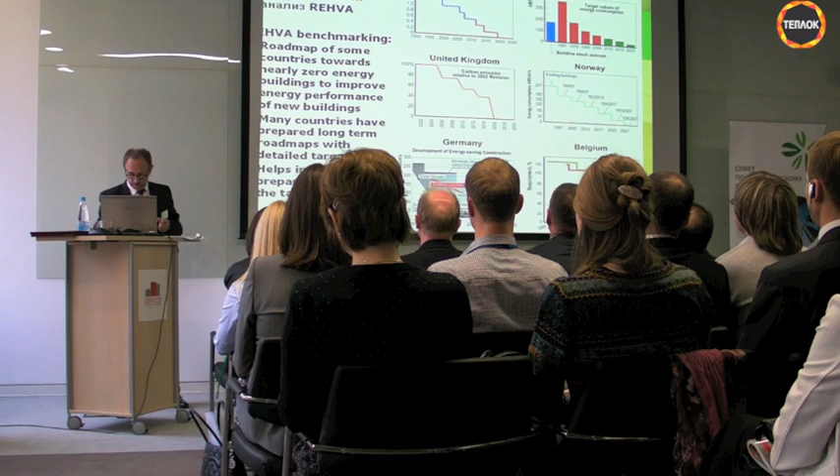And to reach these targets, there are all kinds of incentives for businesses and individuals. The first one is funding for energy repairs and renovations, which takes place in most countries. These are very challenging for low-income households. That's why there is financial help in most countries for these kinds of families. And there are green loans, tax deductions, and so on.

What started this year was the feed-in tariff, which means that individual buildings can also produce electricity to the national network.

Okay, so let's see the energy consumption, where we were in history and what the target is. This is energy consumption in kilowatt hours per square meter annually. The building stock in the 70s varied very widely, from 150 to 300 kilowatt hours. And I think this is the case also in the old building stock in Russia.

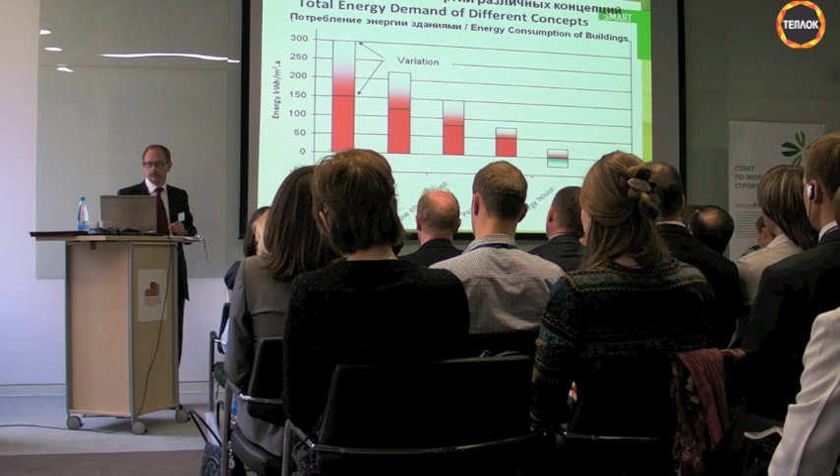If we use solar energy, let's say having solar panels, this production takes place from March till September, October. But the consumption has its peaks during the winter time when there is no production of electricity or energy. There are ways of storing the energy, which we see a little later on.

In many countries, there is also talk of having so-called eco-cities. The first eco-city in the world is Masdar City in Abu Dhabi. That's going to be a city for about 20,000 inhabitants. The first phase was already finished last year. We are also opening our office here this month, or let's say in June. Masdar City has the target of being a zero energy and zero emission city.

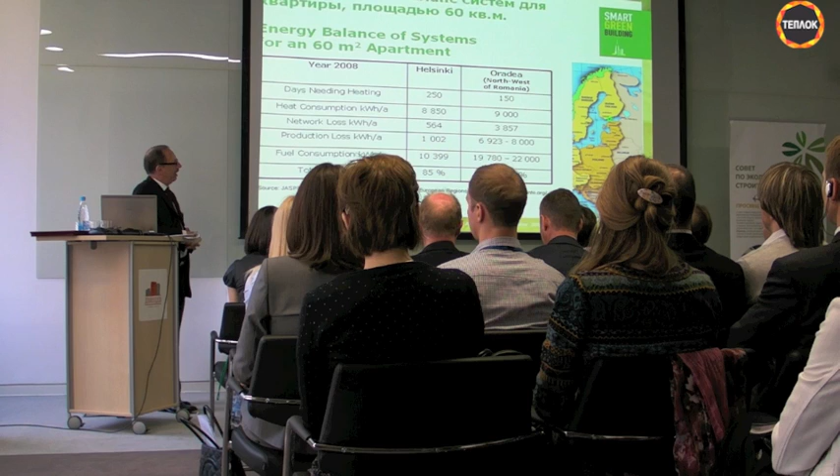Then production losses. In Helsinki about 1,000, in Oradea 7,000 to 8,000. Fuel consumption in Oradea is 2 times higher. And then we come to the total efficiency, which in Helsinki is 85% and in Oradea about 40%. So this shows where the elephant really is, in the production efficiency and also in the distribution efficiency.

The network losses are due to leakages in the network. Also, the water temperature is much higher in the Oradea than in the Helsinki network. Also, the insulation of the distribution network is poor, and balancing of the network is not actually done. But anyway, even though the distribution network is the main focus, there is still reason to focus also on the individual buildings, how to manage those.

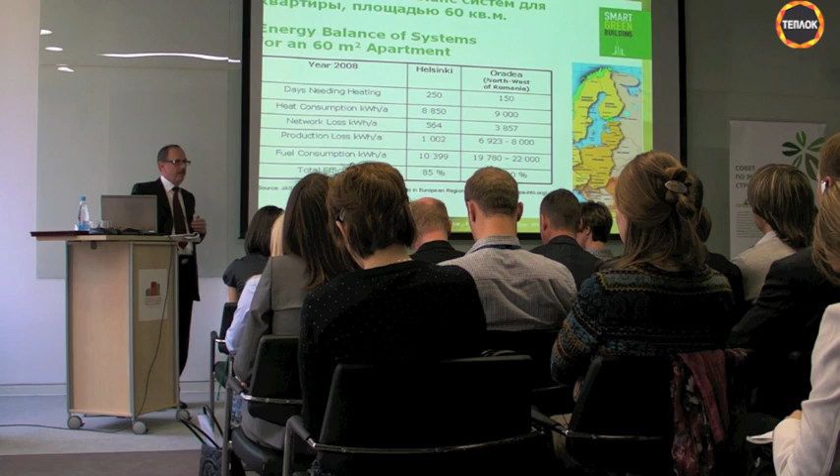The Oradea figures are about the same as in St. Petersburg. And I don't think Moscow differs a lot from these figures. I haven't actually seen any figures from Moscow; if somebody knows if there are these kinds of figures, I would really like to see those.

Okay, then let's go to individual buildings. When we are speaking about sustainability, we are speaking about energy savings, but we are also speaking about good indoor air quality, which means healthy living. And the key factor to both of these is that the building envelope is airproof. If we have air leakages through the structures, it means that all impurities are sucked into the indoor air.

Also, we know that there are impurities in the insulation, bacteria, fungus, dust and so on, and those are also sucked into the indoor air. Also, these air leakages form cold bridges, which means that there can be condensation of indoor air vapor in the structures. Okay, that's one key, and I think already in this respect there is a lot of potential in the present way of construction.

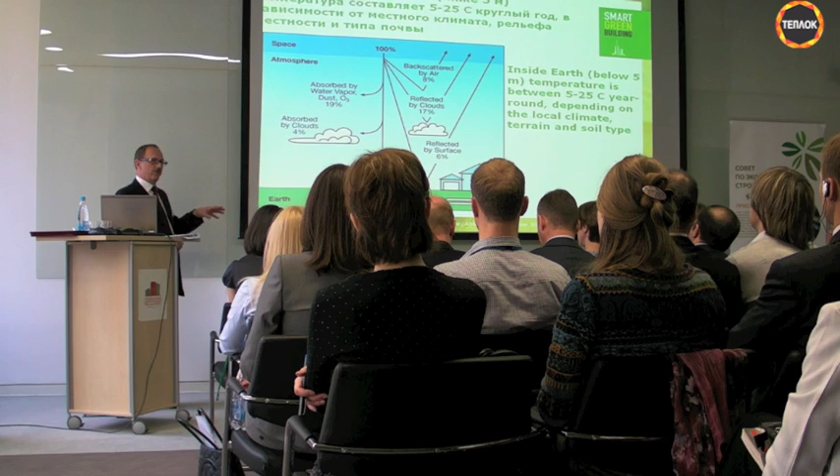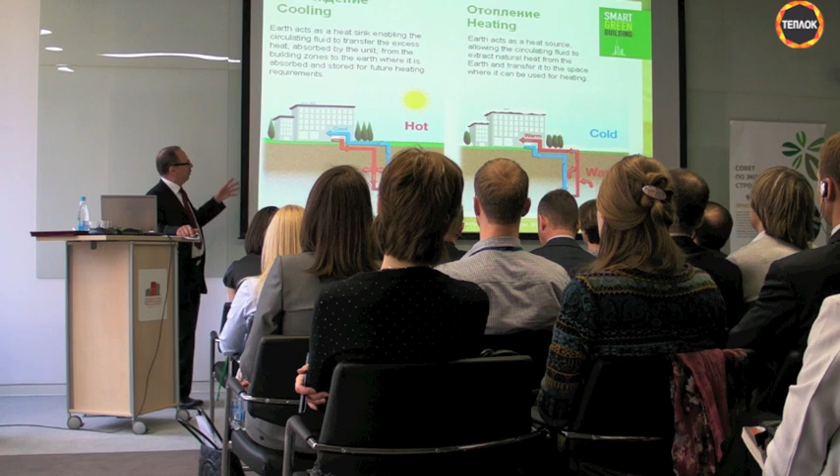And the reason is that inside the Earth the temperature is about stable, and in Russia it is somewhere between 4 to 10 degrees. And that is enough, of course, for cooling, but also for heat. Then we come to the question of storage. We have this kind of system where we have heating and cooling in the same system. In summertime, when it's hot, we can use the energy for cooling.

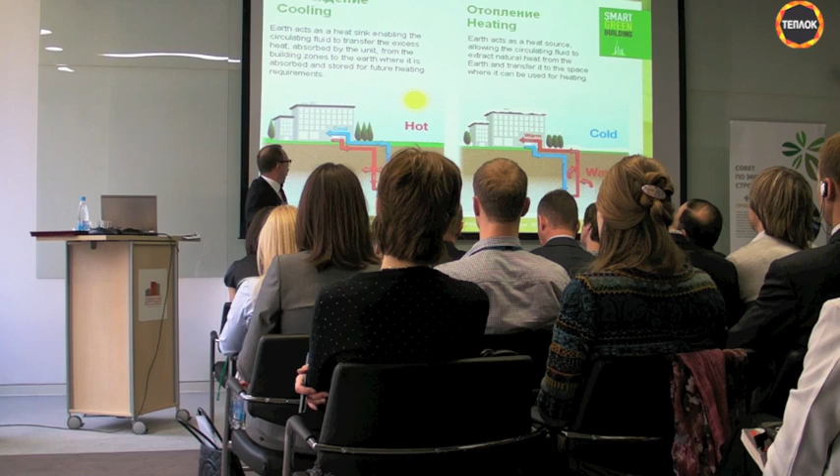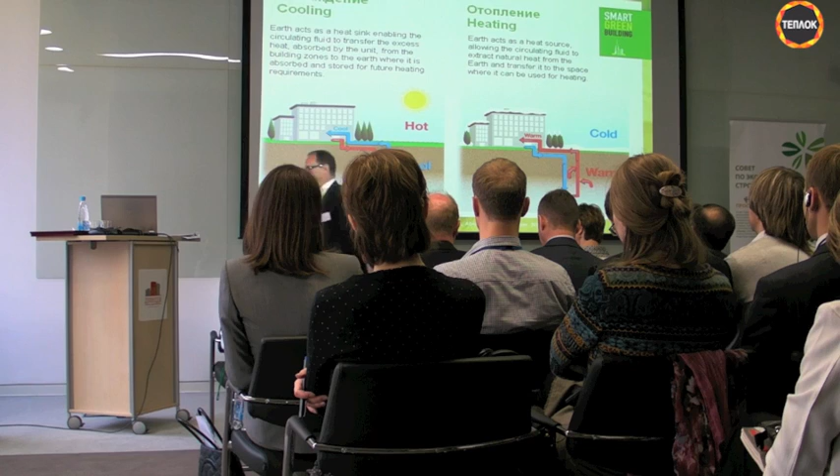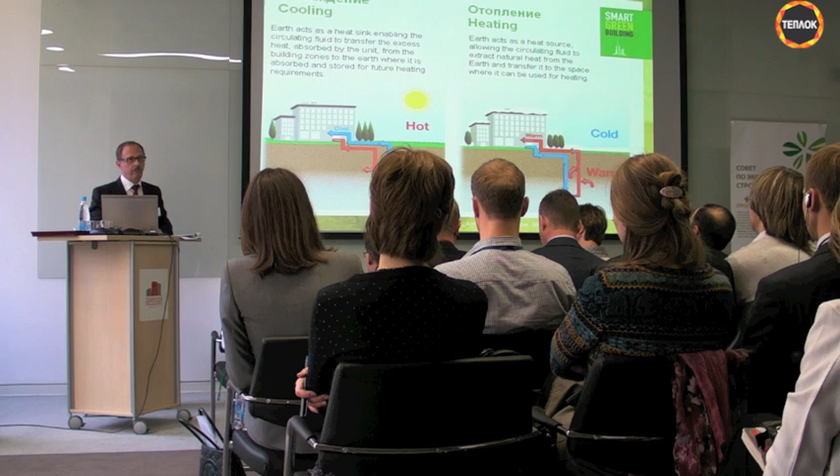It means that we take the coolness of the earth and we return the hot energy to the subsoil. So the ground is the storage. In wintertime it works the other way: we use the heat energy which we have stored there, and we return the cold energy and store it. Actually, that's the way quite large buildings have been done in recent years. And at the moment, most private villas and houses are built this way.

And in these small houses, we can use horizontal closed loops or vertical loops, which go down to 100, 200, 300 meters, depending on the subsoil conditions. A few years ago, we had this kind of project somewhere north of St. Petersburg, and I've been trying to remember the name of the place, but I can't. It was a project of, I think, 12 villas.

The investment cost of this kind of system, the payback time is about 5 to 7 years. And after that, of course, the cost is quite low.

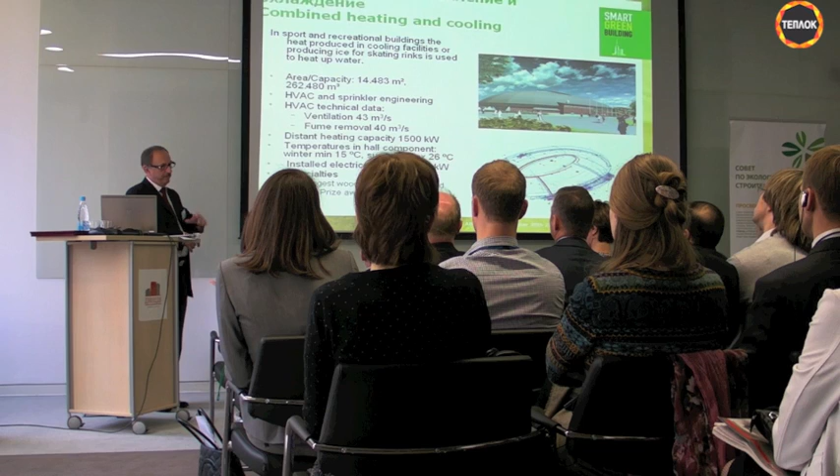We have made benchmarking with, let's say, the US systems, how they make this kind of sport halls in the US. They have separate systems for making the ice and a separate system for heating up. So the energy consumption is actually twice as high. So this kind of thinking is taking place more and more.

Okay, then ventilation is actually one of the main reasons for energy losses in buildings. There are many kinds of technologies to use this ventilation energy. Juha Pihlajamäki is going into details in his presentation on how to recover the heat from the ventilation air. But as you can see, with some systems, up to 90% of energy in the exhaust air can be recovered.

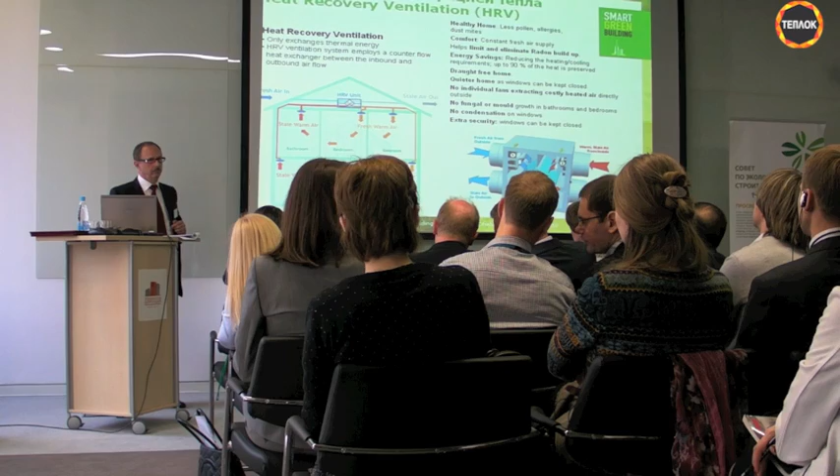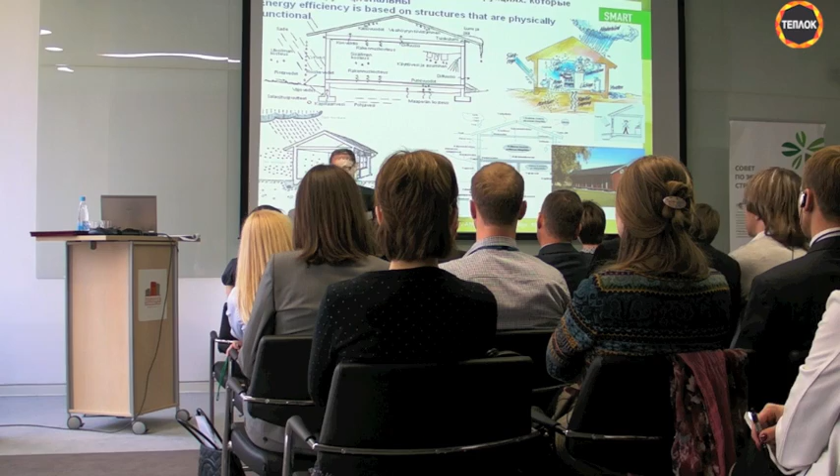Okay, I spoke about the airproofness of the building. That is one theme. Then the other aspect is that energy efficient buildings and structures have to be physically functional. We have moisture coming from rain, from external humidity. There is moisture in the subsoil. There is humidity indoors, which can condense into the structures. So, one of the keys is how to manage the physical loads.

And one interesting dimension is that the climate has been changing so rapidly that the traditional detailing, for example, of facades and roofs, doesn't function anymore. So design has been copy and paste. If we copy the old types, we will not be successful.

Here is, yes, related to the humidity. One key question is, are the structures able to dry out? Because during the installation, during the construction phase, we bring a lot of moisture into the building. We have concrete, we have all kinds of plasters. Then there is rainwater coming and snow. So are the structures able to dry out fast enough?

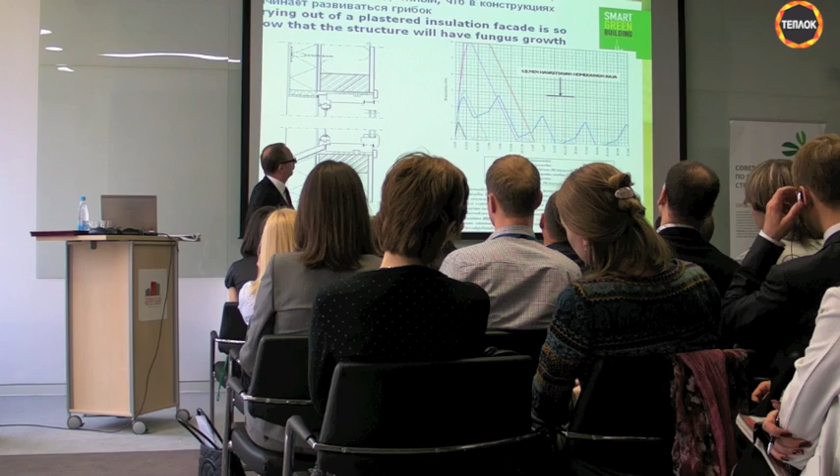Here is an example. We have a plastering, let's say thermoplaster, meaning insulation and then plaster on top. And during the execution phase, some moisture has been coming into this layer. Then with different kinds of structures, we have made simulations of what happens. And with certain materials, we can see that the dry out time is so long that fungus growth starts taking place.

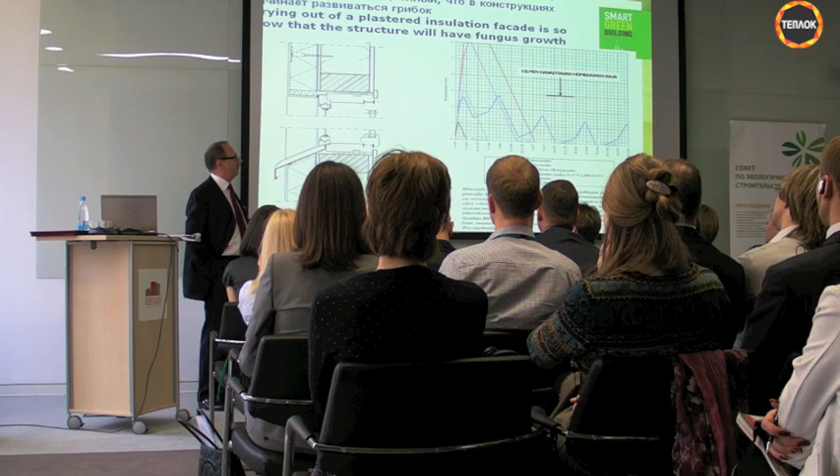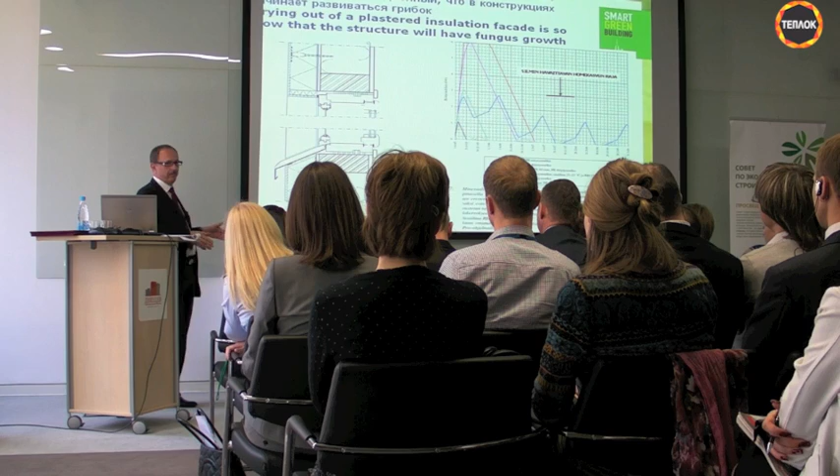And why this is important is that when we are making energy efficient buildings, we are all the time increasing the thickness of insulation. And when we are increasing the thickness of insulation, also the drying out time usually gets longer. The result can be this. In this building in Sweden, the dry out time has been too long, and you can see that there is a lot of fungus in the structure.

Or when we have this kind of brickwork structure, which is very common in Russian facades, we know from practice that it is not waterproof. So after a rain of 10 to 15 minutes, there is water going through the brickwork, running down, and the structures are getting wet.

And it's very typical to have a slab coming to the facade, and the brickwork starting from the edge of the slab. So from practice we know that these places are going to be moist and wet, and there is going to be fungus growth. And as a result, we will also have a sick building with poor indoor air quality.

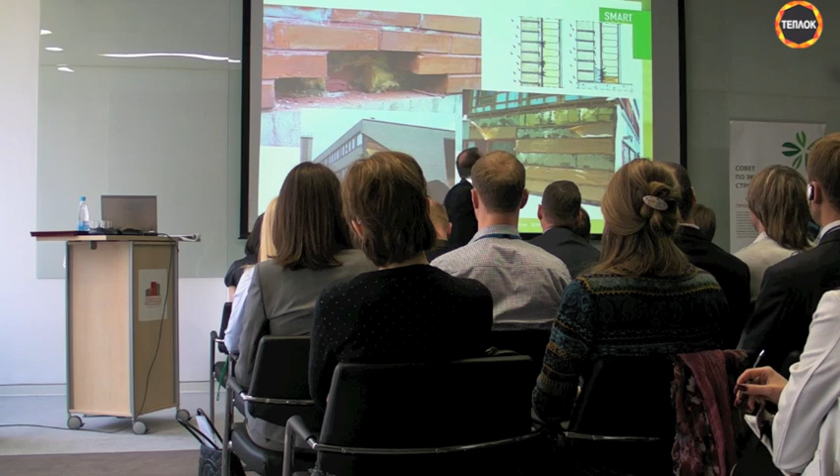So when we are speaking about sustainability, cold bridges like this slab coming to the facade are not allowed. And also we have to manage the water so that it doesn't cause problems. Also, if the insulation is wet or moist, the insulation capacity is much lower.

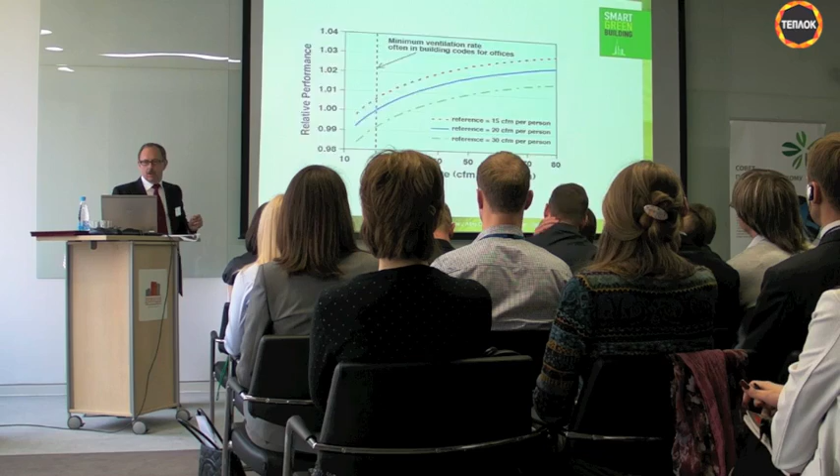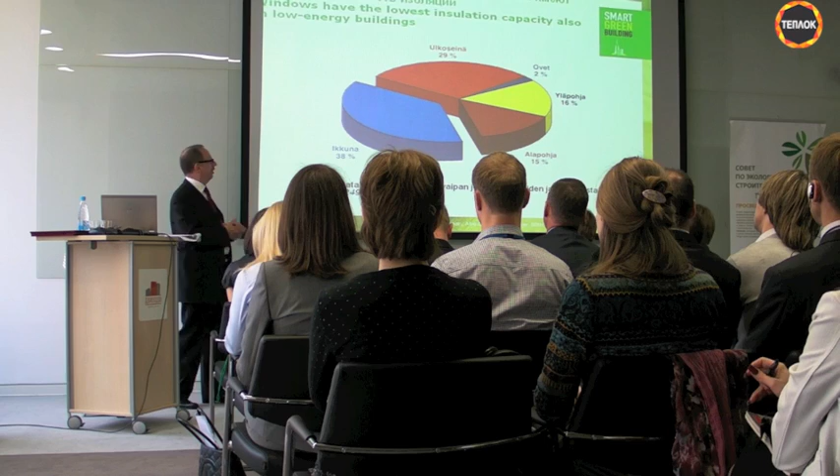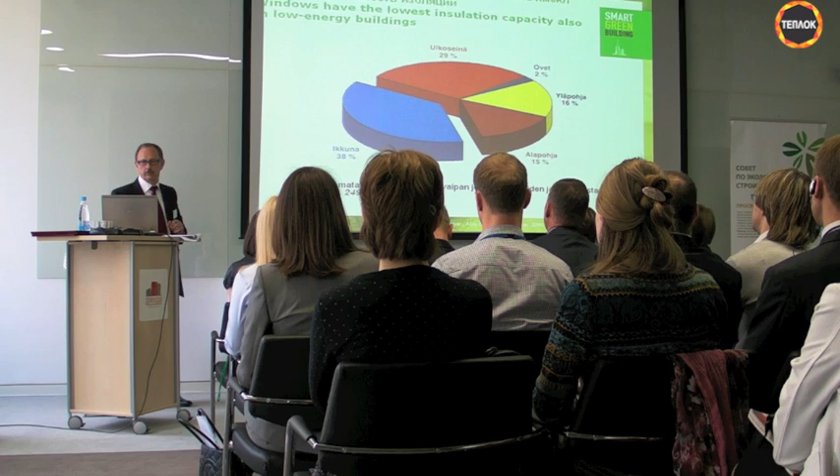Okay, I'll pass this. Then, when we have a passive or low energy building, meaning that the facades and the roof are quite well insulated, the windows are actually playing a very important role. The energy loss through the windows is actually one of the highest when we consider the whole envelope of the building. The Russian norm target is about twice as ineffective as the demand in the norms in Finland.

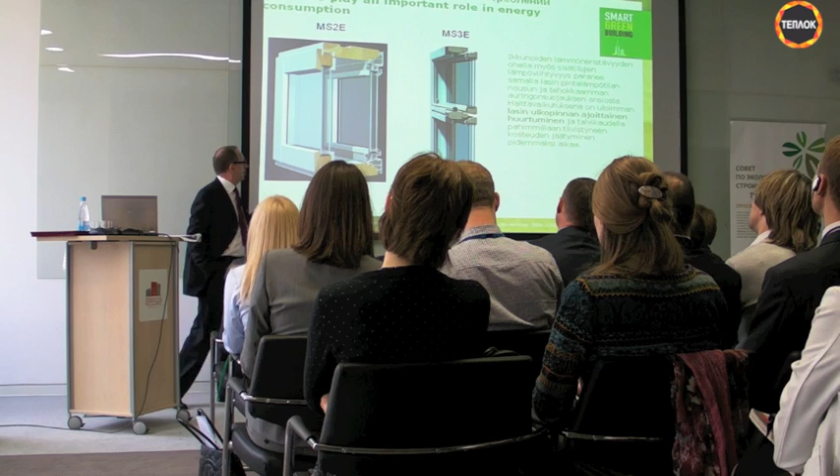Now, today we have very efficient window systems with two double glazings, special gases in between. And with this kind of window systems, we can go, let's say, to 1/3 of the energy consumption than what is the target in the Russian norm.

Okay, then we go to the facade systems and insulations. Here it is airtight, vapor open and reflective. I've spoken about the two first ones, and now we go to the reflective dimension. So the trend is going into more intelligent facade structures, where we can have, for example, layers of materials which change the phase. This changing phase means that if we have water is one phase and ice is another phase. So this kind of materials can be some kind of, for example, wax.

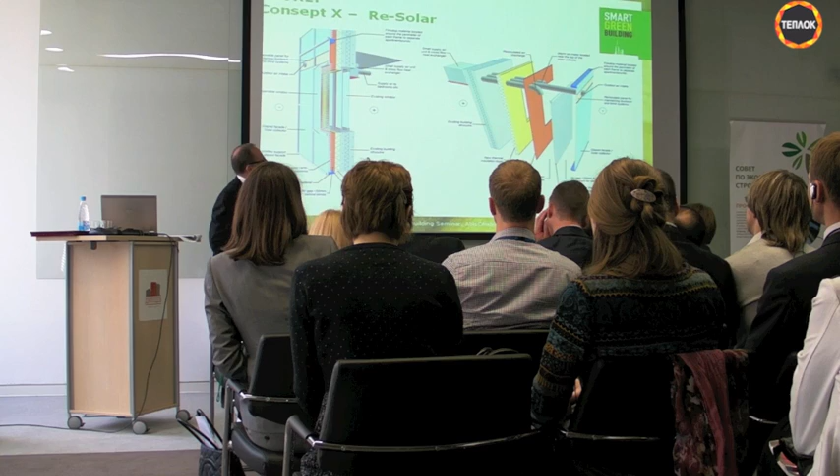When it is too hot, the wax absorbs and stores the heat. And when it gets colder, it releases the heat. And then we can have also different kinds of reflecting layers in the structure. And in that way, we can actually cut down the heat flow through the facade, let's say, I don't even know how much, but anyway, 80% of the present situation. So I would say that these are going to be more and more intelligent.

And when we are speaking about intelligent structures, we have developed this kind of intelligent roof system a few years ago in our company. It means that we use the daytime heat and the nighttime low temperatures and store the heat and the coldness in the structure. It means that we have a dynamic structure where we can change the properties of the insulation.

So during the nighttime, this surface temperature is usually 5 to 7 degrees lower than the temperature in the ambient air. So we store the coolness in the concrete slab. And by daytime we release this coolness into the air. This kind of intelligent structures, I think they are getting more and more common. And there we use natural phenomena, which I spoke earlier about.

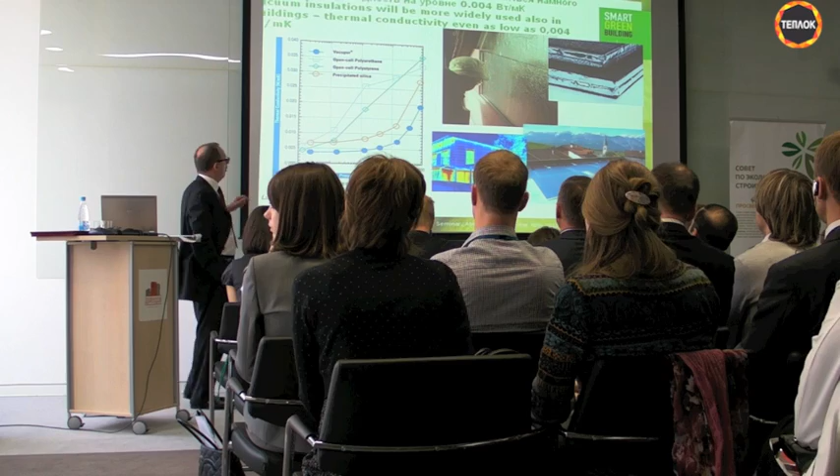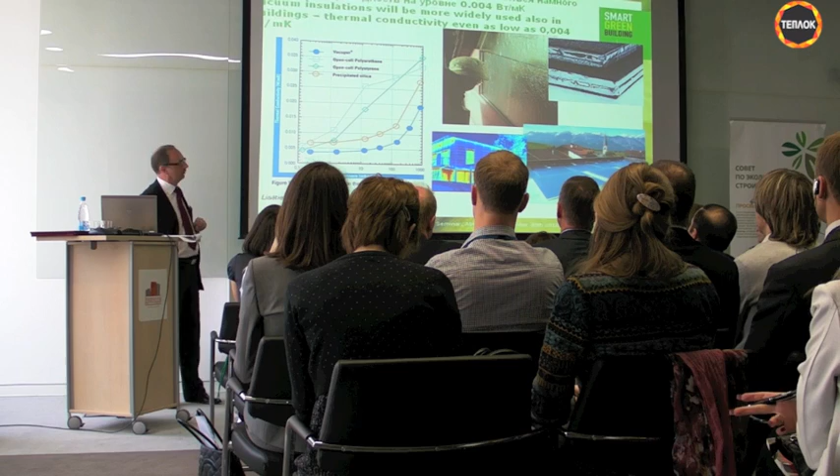Okay, there are many kinds of new insulations coming to the market. Vacuum insulations, which have been used quite a long time in the car industry, are very efficient, as we can see, compared to, for example, polystyrene or polyurethane here. And these can be combined, as there are some, let's say, more conventional insulation materials which may have a layer of this kind of vacuum insulation inside. It means that instead of having 300 millimeters of mineral wool, we can have perhaps 150 millimeters of this kind of modern insulation.

Okay, in Finland, in our company, we have made this kind of libraries for the modern insulation materials, and that is because we have our own laboratory and research and development work, and we do quite a lot of research for these companies. Then there is also this kind of aerogel, which means that it is solid smoke. It's pretty much like smoke, which is solid. Very light, very effective in insulation. Still quite expensive, but getting more and more feasible also in construction.

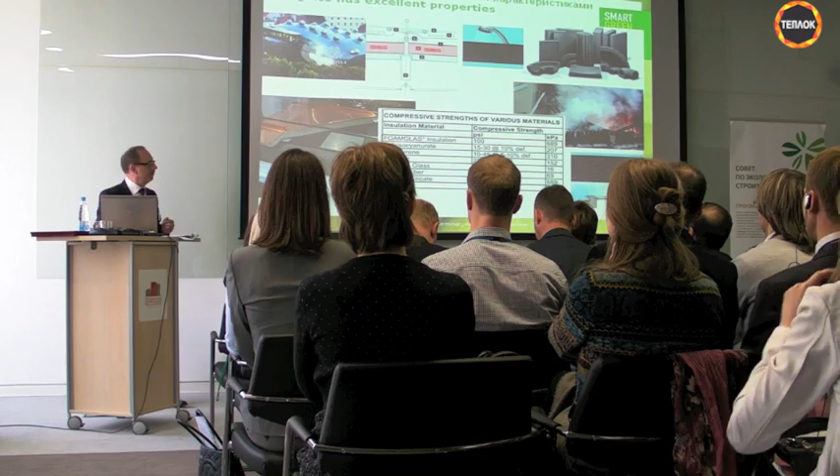One very interesting challenge, I think, is how to improve the insulation or energy efficiency of old buildings like this. Because we can't install any additional insulation externally. In this kind of building, if we install internally mineral wool or polyurethane or anything like that, we are sure to have problems, because that causes condensation and fungus growth. But there are some materials which can be used also for internal additional insulation. They are very open in the pore structure. Yes.

Okay, then I spoke already about the materials with phase change properties, which can look like just ordinary material, but they can have some cells like wax and so on, which change phase and store energy.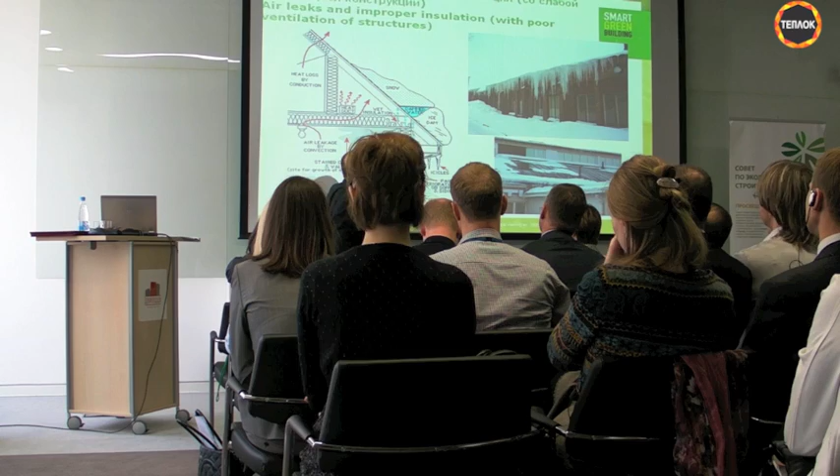This is quite a common phenomenon in St. Petersburg and in Moscow. When we don't have good insulation, we don't have good ventilation in the roof, we have air leaks. As a result, the snow starts melting, forms ice down here. We have water, a pond actually, and then we have leaks in the structures.

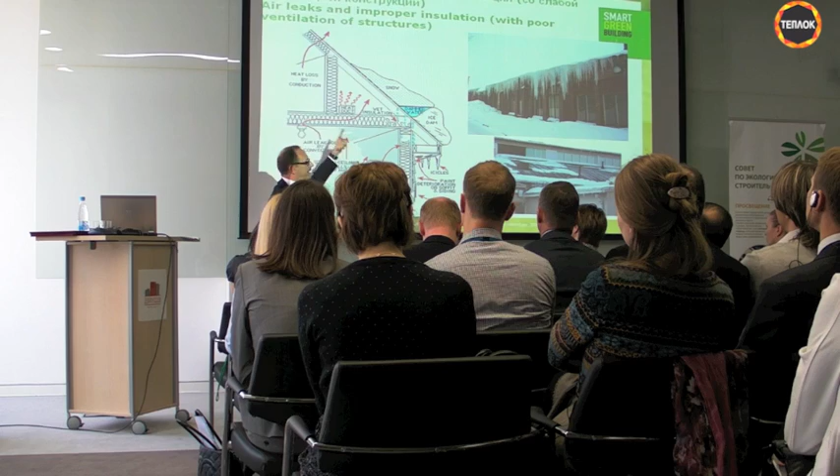So, let's say in an energy efficient building, we can avoid these problems. But always we have to remember that there has to be good ventilation in the structure. Also we have to remember that if we have air leaks, good ventilation can result in more problems.

Then how can we influence water consumption? There are these kinds of systems where grey waters are recycled. This technology is actually Finnish-based. It is used in airplanes. Let's say in a traditional toilet, each flush consumes from 6 to 9, 10 liters of water.

In this kind of system, the water consumption can be 85%, let's say 80–85% lower. This technology is applied, for example, in the airport terminal at Heathrow, where 20,000 people use the toilets every day. So in 1 year, 9 million liters of water is saved.

This is technology which is applicable also to individual buildings, but I would say that it is more efficient in buildings where you have a lot of people, like airport terminals or some sport arenas and so on.

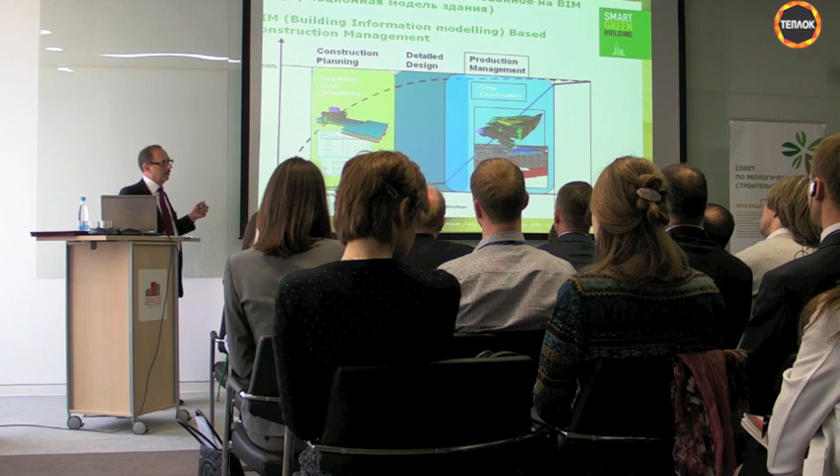We have to plan the process, how we manage that, and then how in this process we integrate the green technologies. In Finland, the tool for this is building information modeling. Which means that all the design is integrated into one electronic model. And you can manage also the timetables and everything with this kind of system.

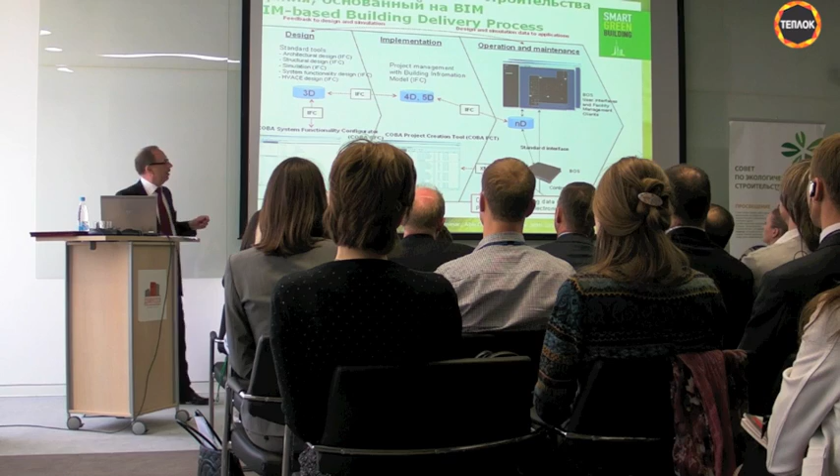And into this kind of system you can also add the control of the building, it can be fire safety, but also in intelligent buildings it can include managing the intelligent systems of the building. That is actually already present today in some processes in Finland.

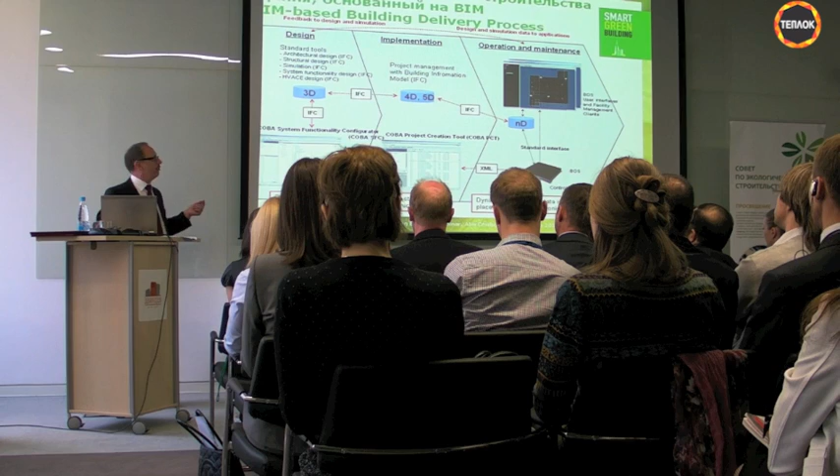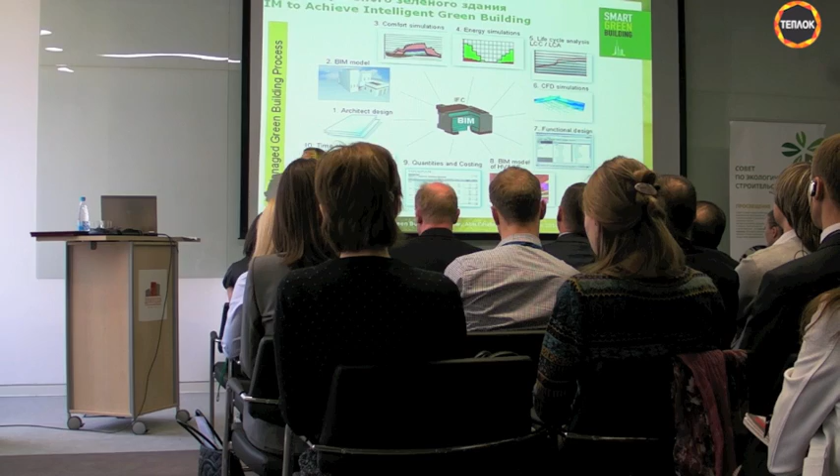Also with this you can make simulations, they can be energy simulations or they can be flow simulations. For example, simulation of wind, influence of wind. All kinds of thermodynamic, moisture, acoustic simulations. And with this you can simulate the behavior of the building up to, let's say, 20-30 years as you wish.